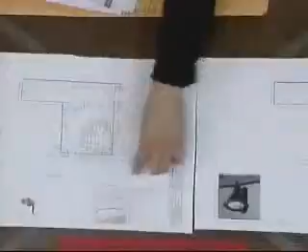So it's actually 3 options, but the same exact location of the fixtures. This is McDonald's, Milpas is here, and the fixtures are going to be here and here, mounted at 14 feet high. This fixture, elevation-wise, is going to look like this - the shoebox type, mounted at 14 feet.

And then the other one - this is the photometric, which I've also shown Tony Bauman, and he said the photometrics looked okay.

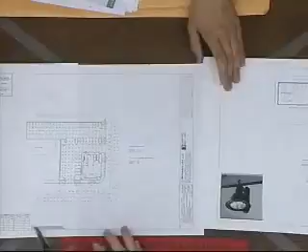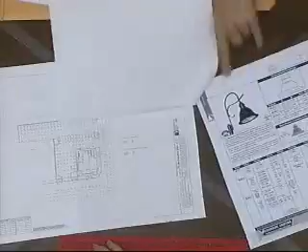You had other options too, right? Yeah, the other options would be a little bit more decorative - there are 2 types from the same manufacturer. It would be either the Odin or the Monterey style. Oh, this is the Odin. This is the Monterey style, and it's also wall mounted.

What does that look like mounted to the wall, because it's just showing the post? It would look like something like this.

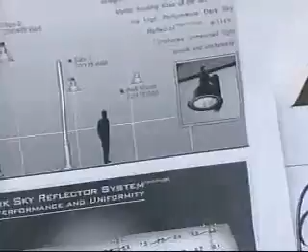So they have different options of either mounting it on a pole or wall mounted. Are you proposing any other lighting? I noticed you had these 3 fixtures - are those existing lights? Yes. So the only ones you're proposing are these 2 in all 3 options? Yes. Does everybody understand that there's only 2 lighting fixtures proposed on all 3 options?

It's just a different fixture. They're all wall mounted. We're losing the 4 big ones we have, and just doing the 2, on the building. No new lighting in the parking lot is proposed, so there's no pole - no new poles. Those are existing that we don't need to review.

Apparently, but they have been figured into the photometric. Right, I understand, I can see that. Do you have a photo of the existing lighting in the parking lot? Do we know what it is - is it the shoebox type? It's actually not the shoebox, it's more streamlined, but it's not the shoebox.

While he's looking for those, is there anybody in the audience that would like to comment on this item? Do we have any letters or anything? No? Okay, I'll close public comment and bring it back to the board for questions.

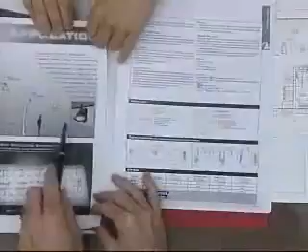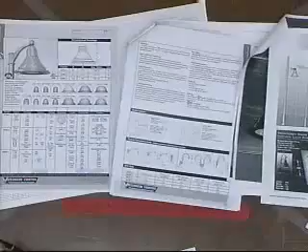And it's either that one, or with either fixture? Yes, what was the other fixture you had? There's this one, and then where's the other one? The shoebox, and this one, and where's the third one? Right here, right there. Okay, let's keep all these out. That one, and the other one would be the shoebox, which we have somewhere in here. Okay, more questions?

What's the proposed finish on the actual fixture? We were thinking for it to match the color of the building. If it's this one, it only comes in the bronze, and the other one comes with like a tan color. So it would be something that would closely match the exterior of the building.

This one? And these two would match the color of the building? Yeah, the other one is like a darker bronze. It depends on what we choose with the fixture. The other fixture has a tan color that comes with it. The shoebox will just be also to match existing, like a tan color that we have.

Questions, Clay? Is this the one you're proposing as an option? This fixture? Yes. With the same housing? Because there's six different housings, seven different caps, and nine different colors. We're just trying to get a sense of what you're actually proposing.

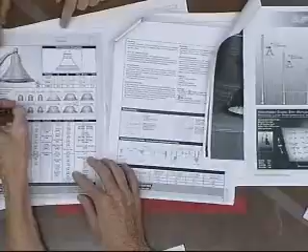Yes, so we have cap number 5, housing number 5, with the arm shown in that photo, right? Is that the right arm? Yes, oh no, yeah, that's the right arm. It's the VA-110. And then the finishes down below, we have bronze, black, white, sandstone, weathered brown, silver metallic, verdigris,

forest green, and custom. Yeah, this one would be bronze. We're not sure yet on the color. Well, you could ask the board for direction, but I'm just curious. We were thinking the one that matches most the exterior, but with this line, they only have the bronze that I would think would be the closest. Okay, those are my questions.

Unless we actually need a custom version. Bronze is what you're proposing. Okay. Chris, do you have any questions? Did you get brought up to speed? They're proposing two lighting fixtures on the corner of the building, and then there's three options.

Okay, comments from the board. Anybody want to start? I'll start. I'm okay with the lighting locations, the two lighting locations, they sound reasonable to me. The shoebox one I don't feel fits the architecture, so that was something that I really wouldn't be

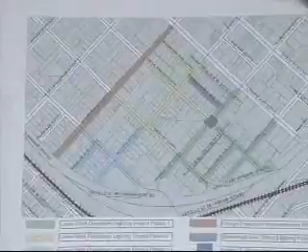If we go to the second page, it shows more detail on Phase 1, including the placement of the streetlights.

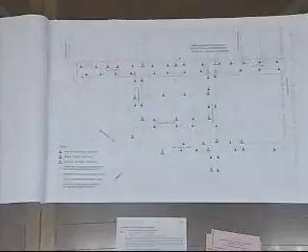This project will place 2 streetlights at every intersection and 1 streetlight at the mid-block. You can see that by the larger fixture that's light green in color. The smaller fixture that's dark green in color represents the pedestrian lights, the smaller scale lights that hang out over the sidewalk to illuminate the walkway. You'll also see some yellow lights on here — those are existing lights, which we included even though they're not part of the project, so you could see what other lighting is in the area.

We basically used 2 bases of design when we looked at this area. We took Haley Street, recognizing it as a primary pedestrian corridor, and we are planning to install more pedestrian lighting on Haley Street than the rest of the area. As John talked about with Ortega Street and Anapamu Street, Haley Street will model those improvements with the number of lights — lights at the intersection, a light at the mid-block, and 4 pedestrian lights on each side of the street to illuminate the sidewalk.

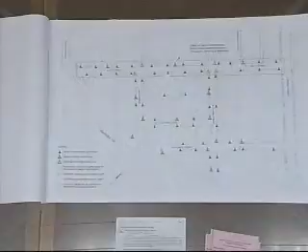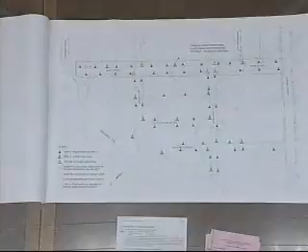Now, on our third page of the submittal — well, okay, great. I thought we had photos of the Photoshop drawings of the streetlights to be installed, but I guess that didn't make it into the submittal, unless somebody... No, it looks like the page... You have a set... We don't have it. Or is it the next one? No? Here, let's... Oh, here we go.

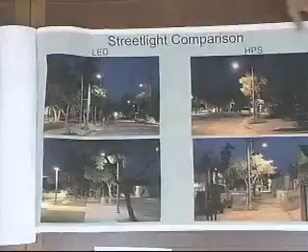Anything in your path. And then the final submittal we have for you, we calculated out the photometric plots of both technologies. LEDs on top, high pressure sodium on the bottom, and provided some calculations on the cost differential.

The energy reduction over high pressure sodium for this sample block is 30%. And when you include maintenance costs in the payback, the city will start to see a savings in just under 3 years.

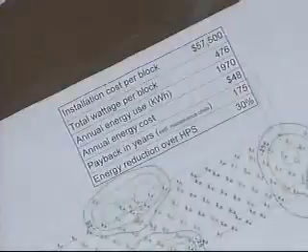That's excluding the maintenance costs. And like Jim mentioned, the big driver here is the ability that the light engine will last 50,000 hours, versus maybe 20,000 if you're lucky with a high pressure sodium light.

That concludes our presentation. We'll be happy to answer any questions, and very anxious to hear the comments.

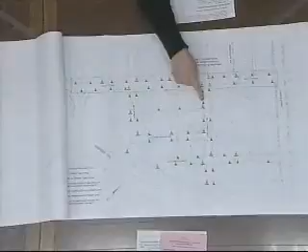In 2009, right here, a boy was murdered. He lay here all night long, and a lot of pedestrians walked by him and never knew he'd been stabbed. We all thought it was a drunk that fell asleep here. We didn't discover it until daylight, and maybe we could have saved his life, I don't know.

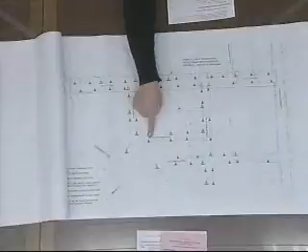He was attacked by a gang. There was a shooting here in December of 2008. This street last week got extremely heavily tagged right where the lights would be going. One of the things the police advised us when we started pulling together our neighborhood is they said, you've got to get lighting in here.

There's a lot of dark holes here, we can't see, you can't see. This is what creates crime. It was us pulling together as a neighborhood. We applied for the CDBG grant to get the lighting design approved, and we pushed it through our city council and through the city to try to get this done.

I wanted to let you know that one of the reasons it's really important for this neighborhood to have these lights, why it's a priority project, is because the neighborhood has suffered a lot of crime in recent years. This would be a real gift to us in making our neighborhood safer at night. The bar district is right here, there's a lot of heavy foot traffic going back and forth late at night, and this is usually when we experience problems and graffiti. So this would help us a lot, I just wanted to share that with you.

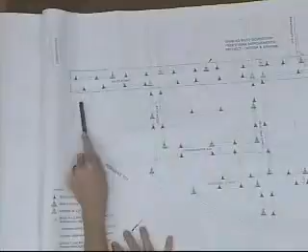The only thing I see with this first stage program that I find may be a little problem is this one intersection right here. I notice we don't have any higher lights in this area, and I kind of feel that's a dangerous intersection for pedestrians and bicycles, especially at this island where you only have one pedestrian light. I don't know what the existing street lights are here, and I see in both proposals, even Phase 2, you didn't address that intersection.

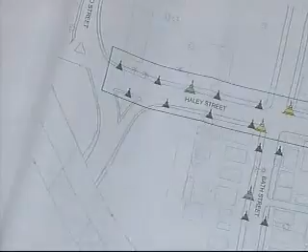So I do see some pedestrian lights here, and I would think the island one should either be upgraded to a larger 33-foot pole, or bring some lighting down to this corner where it drops in elevation — this is a very dangerous part, both bicycles and people are crossing at that intersection. So just study that, my suggestion would be to study that so we can perhaps get better lighting in that area.

Thanks, Gary. Anybody else ready? I have a quick question, comment. I like Gary, I think it's a wonderful project. I'm really happy that we're starting on it, and I think everything you guys have presented is very positive.

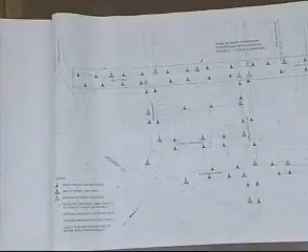So my only question is that I know these are street lights that are existing already and probably not part of your particular project. Is that it? They are being installed with the bridge replacement project. Okay, yes, so I just wanted to make sure that on that bridge design, or the walkway, it was a well thought out pedestrian crossing system — just to make sure all the poles are located wisely in that regard.

The only other question is I noticed this gap here — off of here you have one light and one light, but there's a gap where the bridge comes across. Is that a conscious effort not to light the bridged area? Well, we couldn't actually put one here because that would have been installed in the middle of the bridge deck. I see, right. So the nearest spot we could put it is basically right here, and we already have one right there, but we could move that one over a little bit to balance it out.

I would otherwise think that might be an idea you might want to consider — maybe stretching these out, from here and here, and moving these over a little so you could capture a bit more of that bridge. That'd be great. Thanks, that's it, Madam Chair. All right.

Clay? I just had a couple of comments along those lines.

I understand that from your legend here that all these Cobra lights are being removed, correct? Correct, yes, the poles are remaining, but the lights will come off.

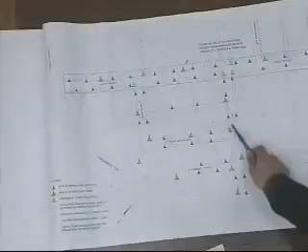I was kind of looking at the proximity of these two lights and that there was nothing on this side. I was wondering if maybe you could jump over here and have that one at the corner. I saw this as sort of a dark zone glaring at me, and this is a dark zone, especially this kind of alley entrance.

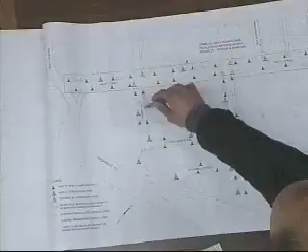I, along with everybody else here, think this is a great project. I wouldn't want to see it all get done and then have some real glaring deficiencies like that. So I appreciate you guys coming back with either studying the photometrics to make sure it's working fine, or adding additional lighting if necessary.

Keith? Yeah, I agree with all the previous comments. I think Clay has some good points about making sure there's no dark spots. But other than that, you're providing safer streets, better quality light for less money and energy, so it's a really great project.

Could I just add a comment on the dark spot issue, which is the Ortega and Haley designs really don't have dark spots. You can look down those corridors currently on Ortega and see for blocks if someone is coming down the street, which is the intent of that style, intensity, and pattern of lighting. So the other street lighting, aside from those major corridors, will have...

I didn't want to give you the impression there'll be no dark spots, but the Montecito style of lighting does have some intermittent areas where, if you want to call it a dark spot, it does have dark spots, but it is what staff believes is an appropriate level of lighting for the neighborhood for those non-primary pedestrian corridors. We didn't see it as prudent to have the Ortega-style lighting on every street in this whole neighborhood.

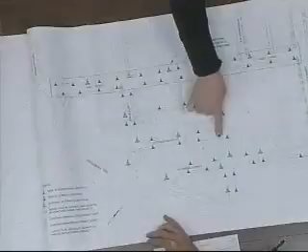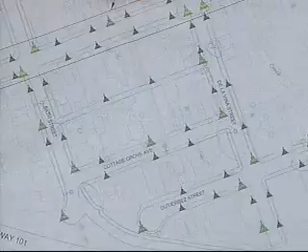This is not a heavy pedestrian corridor. It's a parking lot with a lot of cars and just a chain link fence that people could get over in the middle of the night, but they don't. I'm just telling you, I live right here and watch this all the time. They don't.

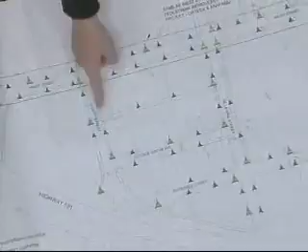Second thing: this is an off-ramp from the highway, not a pedestrian area, so a dark spot here is not necessarily a problem for us, and it hasn't been. Here, it's good pointing out that this little place is a bit dark. On Bath Street, the residences butt right on to the sidewalk — they have no front yard, they really abut the sidewalk. So if you put a bunch of lighting right here, it'll be shining literally a couple feet from them. I just wanted to point that out.

Thanks. Any more comment? So this is a comment-only project. It would be an indefinite continuance motion. Would anybody like to make a motion with comments? Anybody?

Madam Chair, one question for the board would be, do you want this to return to the full board or go on the consent calendar? I think it could probably be ready for consent. I'm hearing positive comments and just some manipulation of a couple of areas and finalizing the exact locations. Is that okay with everybody?

Consent, okay. Another question: when phases 2 and 3 return for ABR review, would you want those to come to the full board or send those to the consent calendar? What does the board think about that? Consent?

I think it's a good idea to come before the full board for us to review what's happening and then move it on to consent. I don't think it's too much, and it doesn't have to be a full presentation. We're used to it, we know the program, so it could be an abbreviated presentation, and then we just see it and send it on to consent. We'd be happy to do it.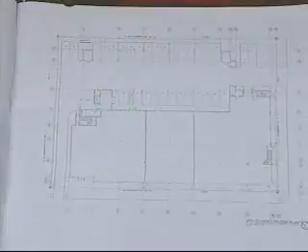Most of this space on the ground floor of the building is developed as classroom facilities, student service offices, and a mezzanine that includes their library, in order to make them work with their academic center and classrooms. Just to give everybody a little bit of idea where we all are.

So there's a library mezzanine that's in that same first floor area, and on the upper portion of the building there are these two pods that are on this level—administrative and staff offices, and some smaller classrooms that are surrounded by terrace area. There are residential units that sit on top of those floors that are to remain.

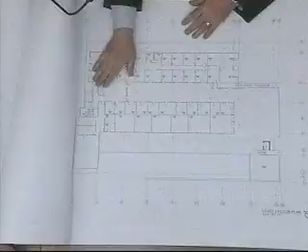I would say some back-of-house traffic will actually use this elevator, or people who are coming from the parking lot area where it's somewhat easier access, but in fact this larger outdoor area on the second floor is really for an urban campus, kind of like the student commons.

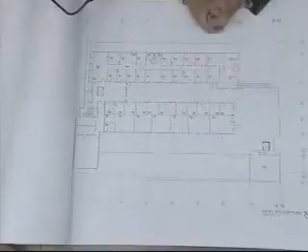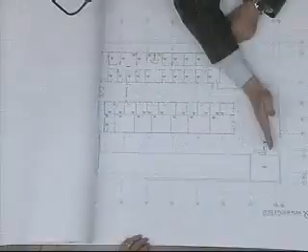So the truth is, for us to try to make a proposal that really rationally connects all those floors so that there's some kind of cohesive student traffic and sense of the whole building as one, our proposal is actually to provide a new elevator shaft, which requires the removal of a piece of sloped roof that sits in this pocket, and the redefinition of the parapet wall, so that we will take the existing parapet, which currently drops back to about where this elevator face is now, and move that parapet wall out towards the street. That will actually give us the elevator and a stair.

I can back up a bit, which we can see on two different levels, into this main lobby of the space on the ground floor, a new stair that will wrap around that elevator and the elevator shaft, so that this can service all three levels of the building.

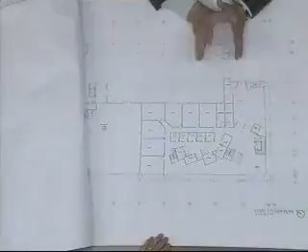We looked at a number of different places to do this, but because there are structures above, the elevator over-travel is higher than, even to access the mezzanine floor, is higher than the deck level of the second floor.

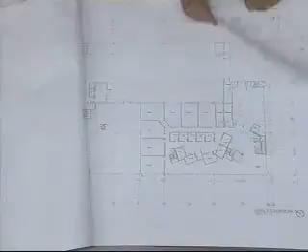So in terms of trying to find an appropriate position for this piece of equipment, our proposal was to modify that facade. The piece of the building we're talking about is in between the tower that exists on the corner and this part of the facade on Coda Street.

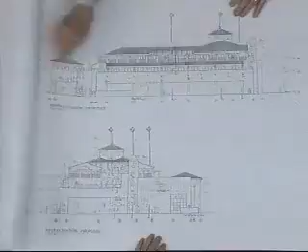We have some photos. There are some elements that we're copying from another part of the building to mimic how a new elevator might pierce through. But that is the proposed facade change, where that roof, this parapet, would move forward.

It'd still drop back into this plane, and we would carry that wall up, and behind it by 4 or 5 feet is the tower, which sidles up next to the other tower.

We proposed to add some architectural features to this, a little window to copy some of the grillage type detail that exists in other parts of the building, to try to unify this piece of the facade change back into what would look like the existing fabric of the building.

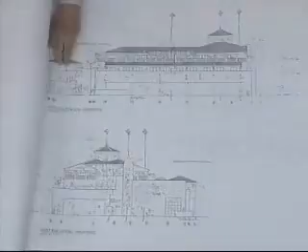I think there are some, just in terms of where things poke up over other parts of the building. That would be the shaft of the elevator that would be abutting the side of the little tower as it could be seen from the terrace level.

In terms of a viewpoint, there's some little perspective renderings of how we think that will work and how this component fits in within that facade drop back.

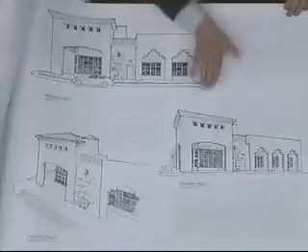And there are some photographs of the existing facade, and that is the piece that we're actually talking about in that setback that exists on Cota Street.

We've done some walking around up and down the block to kind of figure out what you'd see. I think the only people who actually get a look at this cavity are the people who have to park their car in the parking lot across the street from the bicycle shop. Otherwise, the viewing angle from the intersection is too tight to really get a good look at it.

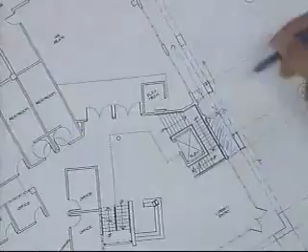And what you're looking at, the recess you're looking at, is right there. I was trying to figure out the same thing. So, stand correct - people come out here, everybody's right, nobody's wrong. They come out here and go around. No, there will not be an exit at this point.

There's a door shown in there. It is our intention to actually make it a dummy door, but we intend to reuse part of that door for air intake on the bottom side.

So, no, the issue here is just to clarify - looking at this here, where that arcade goes that way, people walk through this arcade right now, come to here, and then they walk around like that. Is that it?

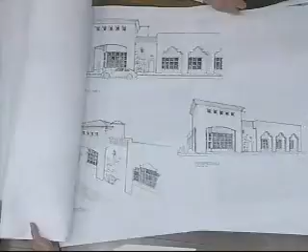They actually do - all of those arcades are grassed and planted. They actually walk down the side. It's all arcade landscape, a shadow landscape effect underneath there. Okay, alright, you can kind of see it. Other questions? Oh, you had another question, Gary?

Questions on this side? I had a question - I'll refresh my memory here after we just did this exercise. Do whichever page you want, this will actually be helpful.

So, the face of the wall, which is covered by this large bird of paradise or whatever, is basically here, that's correct, and then this roof goes back. So, essentially, the proposal is to bring this all the way up, and then this would come across as a parapet, that's correct, and that'll have...

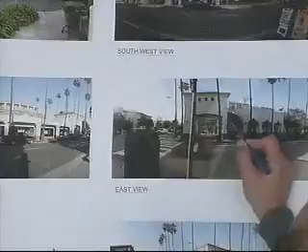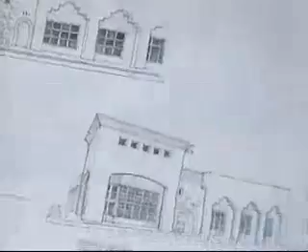So this roof comes back, and there's going to be a new floor in here, and part of the exterior deck is going to happen behind that because it looks like the elevation of where the patio is, which is probably right around here - there's nothing there, so you're filling that in so you can do the elevator tower. It's kind of like right here, I guess. Right, like this is coming back as a roof coming back into there, so that's all being filled in. That is correct.

And then when this project, years ago, the tenant who was going to go in this area came to us with some ADA problems in this zone. Has that all been rectified, do you know? They actually came through issues on the ground floor - they came through with an application to do an ADA ramp here to get into this door at one point.

And then they obviously never did the work, but I don't know if they did the work to be honest with you - they sloped the sidewalk on the Anacapa side up, so that you can get to the corner. So is there a step down or something on this side, or I can't remember? There is on the Cota Street side, so that work was completed at some point. At some point, okay good.

Thank you. He walks by all the time. Keith?

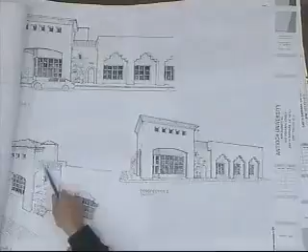No questions - yeah, so the other comments I had, questions I had is that will we be able to have this perforated? I see it backs right up to the back of the wall, or at least that the holes are deep enough that they look like the others that we have on the building where they are perforated. Our intention is to make them deep enough, but not to actually have them perforated.

I see, okay, we're pretty close to roof structure. What's happening right behind this wall is actually the rise of a staircase that goes up to the next level. Right, we may be kind of close to the top - we may actually get to use part of those as actually perforated, glazed from behind, that we would hope might leak some light into that staircase. But at present, since I think we're so close to the thickness of the structure, it was really just meant to be relief.

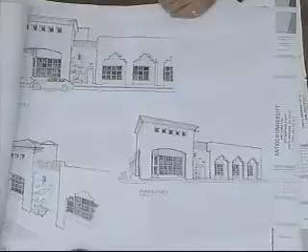Okay, and therefore, is this window just for relief as well? No, that window would actually be servicing the stair - it would service the stair behind. Okay, that's the only questions I had. Okay, so we bring it back to comments.

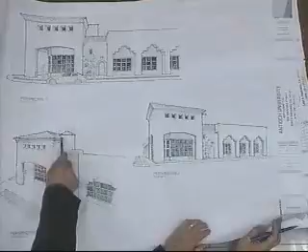Thank you, Mr. Chair. I would agree with what Keith said, and I think it doesn't really show up here so much, but this element for me seems a little too... It's almost like it wants to be a tower, wants to come up and have a little bit of presence, and right now it seems a little diminutive, and a little too close - this roof element to that roof element seems to me to be a little too close, not that it's way off. For me, I don't mind this, but I know you said in your presentation that nobody's really going to see this or notice it unless you're parking at the wheelhouse. But in the effort of trying to infuse a little bit into this, it almost seems like the tower wants to read as an element, maybe all the way down to the ground, maybe not, and still maintain that. But I'm kind of struggling with this here.

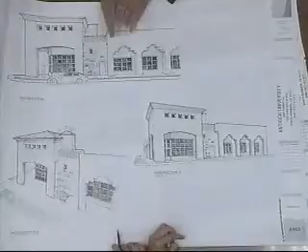Well, we were almost ready to bring another drawing. Oh, you have one. As we looked at this internally, we thought that if there were another existing element on the building that's similar, it's the kind of Moorish tower feature that exists on the other side of the building, and that this might really have been the appropriate component to attach there and to kind of mimic that piece on the other side. Yeah, I was looking at that earlier when you were making your presentation.

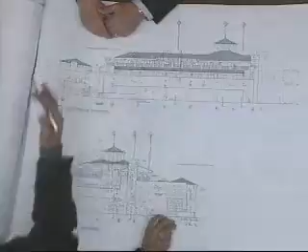Right. And here's the elevation I think I was talking about, where you've got this, and this comes up proud of the ridge line, and it has a presence, and this really doesn't. I don't know that it needs to be that high - I think that's probably too high for this area of the building, but this seems a little too close a call. Yeah, it's too close. And I think Keith's comment is if this got a little bit wider and you could provide shelter, somebody could stand underneath it and not have to worry about that, and protect the equipment. I think those are all good comments. But I think that could use a little bit of height and maybe a little bit of girth, a little weight. Other than that, everything else seems right on.

Gary? Yeah, it's... I would agree with the comments that we have.

One thing I would like to see, though - I've been struggling with this building. It's come with a few things. Arch Rock came with some projects around the exterior of this, and we're dealing with a project with it earlier. We're going to put a bar in there or something. And landscaping has been an issue with this, and lack of landscaping, and we have been slowly eating up the tiniest bit of landscaping that it's had. These are concerns of mine.

One thing I would recommend on this particular project is, if this is in fact a dummy door, I really would like to see the dummy door go away and the concrete that's in front of it go away, and an addition of landscaping with a larger feature. I think this would be a great spot, especially if we're getting rid of this roofing element that actually added some breakup of the building. If we could add a larger palm tree in this area to give it a breakup, or an illusion that there's some landscaping on the building.

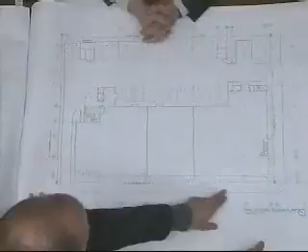We have this really nice new ordinance that limits the height of any greenery in a parkway. This isn't really shown accurately, but there's a parkway that runs all the way down. The city doesn't do anything to it, the applicants have to. There's another one on this side, basically turf, which is now not allowed under ordinance. They're doing some work here and along here, and then redoing the parkway up to about here.

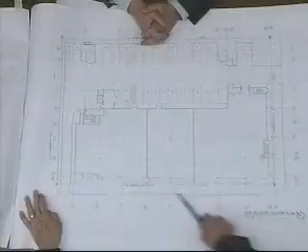But I think it bears discussion to have something done along the parkway, either a continuum or at least complementary, something along here. And I agree with Gary's comments about these areas, that it's landscaped but sort of tired landscaping, and it could use some freshening up. Our landscape guy isn't here tonight, but he's been reviewing this as well, and I think he would make the comment, so I'll make it for him, that we need to really look at the parkways and the landscaping on this site, because as Gary put it, it's pretty minimal at best.

Do you know if the landscaping for the proposal that Arch Rock Fish is making was something that has already been looked at and approved? It's been looked at and approved. Because I would imagine a continuum of that treatment, shouldn't it be consistent? Yeah, they're doing dymondia and some other really low-growing planting in the parkway. I would imagine it would be consistent, since we still think the building reads as a whole.

Yeah, I think it would be good, and I think one of the nice things, my office is right here across Anacapa, so I think one of the nice things about this building, potentially with the new tenant being Antioch, is sort of injecting new life into it. Arch Rock is doing a pretty good job, but really completing the idea, I think, is a pretty valuable effort to take on.

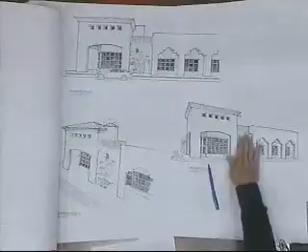And when I look at the building that we have now, that we've had to live with for a while, it really would love to have some sort of landscaping presence that makes a little stronger statement on the kind of scale that we have on these elevations. So that's also a good one. The overall landscaping to match with Arch Rock Fish, or something compatible with what they have, would really be appreciated on both street fronts.

And then lastly, I would say I would look very closely at that entry. The way you have it drawn there works very well, that entry, it's a step up with the ramp and the doors swinging out.

I'm not sure how much was actually done. Clay would probably know all the details since he passes that all the time. But I would look at that very closely to make sure you have your handicap clearances and everything, because if you have to come back to us with a revision, we would certainly see that as being an important element, the front of the whole.

We're really happy that Antioch University is the beneficiary of this property being sold and leased to you guys. I think it's about time we have somebody great in there that can make good use of the building. I think it's a very good marriage. It's interesting to look at the building as a single-user building and see how the architecture responds to this idea of a downtown campus.

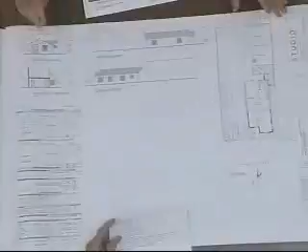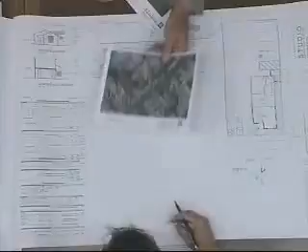Just let me get the minutes - there's some minutes there, Tony? Okay, go ahead - the covered parking structure that used to go along the back, and the exposure to the neighborhood and everything. I was asked to bring in photographs. So this is the project site, the dark roof there, and the surrounding buildings - it's all pretty industrial.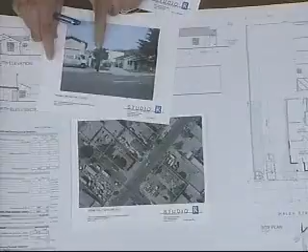This looks like East Beach over here, but it's not - it's just a number of boats in their yard. This is the building immediately behind us, and this is taken from across Haley Street, so that's the building we're remodeling. This building is just off the picture, but right there.

Another shot of the building right behind us and some of their storage. And this is the city weight room park thing and what my client looks at, so bearing all that in mind when we look at how we're storing stuff. Okay, that's over here - this is right here, just to the west.

So the minutes read: the direction of the architecture for the front building is appropriate for the neighborhood. Restudy the design for the parking and storage facility. Provide screening of the back lot and storage area.

Screening of the back lot. Provide a site plan showing all adjacent structures. Illustrate the height of the back building. Study saving the cedar tree or provide significant mitigation.

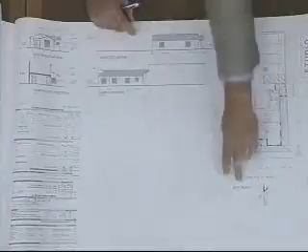So what I've done is I've taken the parking from across the back and run it down the side, so that you don't have that view corridor. You'll have the same view corridor we have now. You'll see this building as you look down the driveway, the existing building adjacent to us. And then fully enclosed it, with a sliding gate to load the stuff up there.

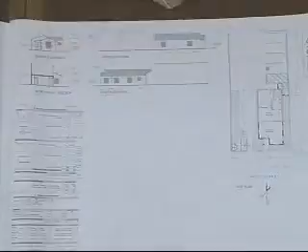Integrated to the building. We've slightly adjusted the architecture in that the owners want to go to the tiles that rake into the plaster, with no eaves on the end, so it'll all tie together. To somewhat mitigate the height of this storage structure as seen from the street, this small shed roof I put over the restroom kind of takes down that scale, so I pushed the window up a little, pushed the roof up a little, and it leaves us less white space on that thing.

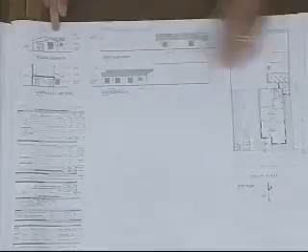This, however, is 50 feet from the sidewalk, so we're sitting way back behind the building. Other than that, everything is as it was before. We're going to replaster. We've got doors that will be stained, and they have a plank look to them.

I'll wait for questions. That's the end of the presentation.

As far as the mitigation of the cedar trees, it has to be gone. But we will come in with a full landscape plan that will be working in conjunction with our stormwater management too.

So I'll bring it open to the board for questions. Keith? Oh no, I took the wrong signal when you moved your hand. No question. Mr. Clay? Chair, I have a real brief question. I'm trying to figure this out.

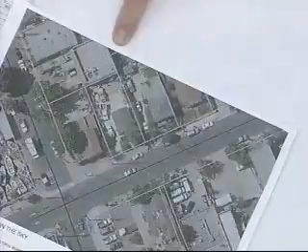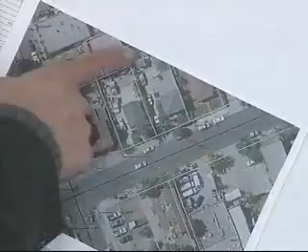Is this a residential property? It's commercially zoned, but it appears to be residentially used. And what about this one that's off, in between the two big buildings? Do we know? This one continues on. This is a 100-foot deep lot, but I think this is 125. I do not know what the one is that fronts the street. There's the property line there. So that's that lot. And we think that, I know the zoning, but that's probably residential. It appears to be, it looks residential.

Is this residential use too? No, that's a park use. It's that boxing weight facility. Got it. So this is commercial zoned? Yes, I verified that with staff. The zero lot line and that sort of stuff. Yes.

Okay, other questions? I'll ask some. You have no additional columns in here? Not at this time. I'm showing a 2-foot deep beam out at the edge going there. Going to span that distance? We're not that far yet, but right now, yeah.

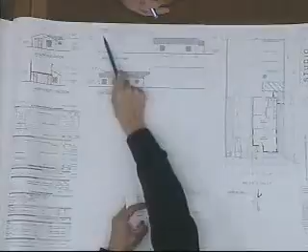Okay, and this doesn't have any ventilation inside? It has no roof, it has no ventilation. It's open to the sky. Okay, we're just screening it from public view.

It'd be plaster block for the most part with a molding around the top, which I think mimics one of the buildings that's adjacent to us or two lots over.

Okay, any other questions? Comments? Gary? I like the new direction as opposed to the two stilted walls and stacking with the door. I think that's a positive move.

I don't know if I'm still convinced about the tree because I really see that this front entry could have been reversed and the tree be saved. The tree's such a big tree that I really think it's a nice feature of Haley Street. So I'm kind of on the fence where I think that tree can be saved.

Another comment is the trash enclosure that's butt up right against the sidewalk. I'd like to see that brought back a little farther so there's landscaping in front of that wall of the trash enclosure, and show that there's actually concrete going in front of the trash enclosure like there would be, not really landscaping. You're right. That would be it.

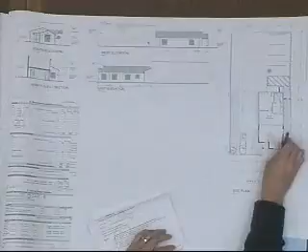change, the mitigation. And I think what you're doing is fine, I just feel that if we go down one road to say that everything is okay, and then we don't see the mitigation, it gets watered down. So if you could really work on that to come back with that, that would really be good.

The other thing is, initially, the way that you switch it, we still have the big building in the back to look at, and then we have these two blank walls to look at. At first when I look at it, and then I hear Keith's comment, I think it still needs work, that there's a problem with that too.

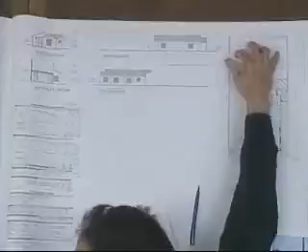So then I think of what might be one of the solutions - this is just a comment that popped into my mind that you might want to consider - because of the back wall, we have that wall already, put it back where it was. Right? I mean, this is just a thought. Here's my idea behind it: you end up with two smaller walls on each side.

You get a bigger void here. Not that it would work, okay? I'm just throwing this out. And the whole front that you have here, you come up with a system of these huge rolling doors that you have to open to service, to put stuff in. And the doors themselves become the architecture. So you have like a blank wall, and then you have a huge door that is full height, and really wide.

And when they close and open, they make this pattern on the wall, all up at this level, all up at that level. And they could be like vertical, finished in vertical slats of wood or something like that, have it throw a shadow when the sun falls on it. You know what I mean? I see what you're saying.

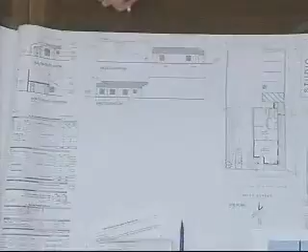Maybe, okay. So maybe that's not why, but I'm just suggesting that. But just to be clear, when you look down the driveway, you're still going to see this big opening, because I still got to park 4 cars, unless you want to grant me relief on the parking requirement. No, you'll still see the opening, but you're going to see cars in it anyway. I guess my big thing is to try and minimize the amount of second-story big flat wall that's in the neighborhood. So that's the only thing I was looking at.

So it's just an idea. I'm not saying that you should take that route, but I do think, along with Keith here, that this needs work. And then I do think, along with both of them, that this is a little unfortunate, and if we can help it any way, it would be a plus. So while I say that to you, I didn't want to just throw it out there, because I thought, how would he try to solve this if we asked him to change it? And that was the only thought that came to my mind.

No, I totally understand what the board's saying. I don't know that the board's looking at the idea that this could happen. This could be a good storage facility, and I don't know that the board's taking into account what my client has to look at. I mean, I've got right next door at that weight room, which is a city property, something that looks like a backyard in Taft, and you look through that, and over there on the photo where all the boats are, there's a high bay rack storage with blue tarps hanging off of it for somebody storing building materials in there. So I'm taking the storage to the next level, and I'm getting hammered.

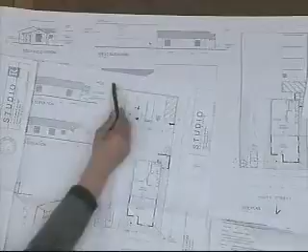And then if you went down the road that Chris was talking about, maybe having 2 doors up there or something, so that you get a little more breakup, I think then you're covering up the blank wall that's already here at your neighbor, and as Chris said, you are minimizing the sidewalls.

I think that shows more potential to break up this big horizontal opening and make it palatable. I had a question too.

This is for scaffolding storage. How much higher are you making it? High enough to hide the scaffold. So is it 5 feet, 6 feet, or 8 feet? Because the scaffold height is about 6 feet. It's a little more than 6 because you can walk stacked clearly under it. They're stacked, almost 8 feet. I'm talking about vertical. When you build a scaffold, they're about 5 feet tall, you stack another one on top with a pin. Look into the height of that, because if it comes down a little bit, it might be a little more attractive.

Keith, I do like that. I can do that.

In all fairness to the applicant, we're trying not to take you down a bunch of different roads here. I think you came to us with that scheme originally, we gave comments, and you came back with a totally different scheme. So it's fair to say we're getting a different look and evaluating the two, because I don't think we ever said to turn the thing 90 degrees. No, you never did.

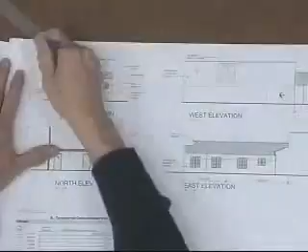So the final comment then is to study minimizing the height required for the storage area to conceal the contents. And under discussion, if there's one thing I could ask the applicant to do, when you show the south elevation, just dash in the wall of the building behind, so we could get a picture of this in front of the big wall. It gives us a proportional view. Okay, so that's the last one, is that all right? Yes, that's fine. Okay, all those in favor? Aye. Against? Motion carries.

Can I keep that one? Yeah, no, this one, no.